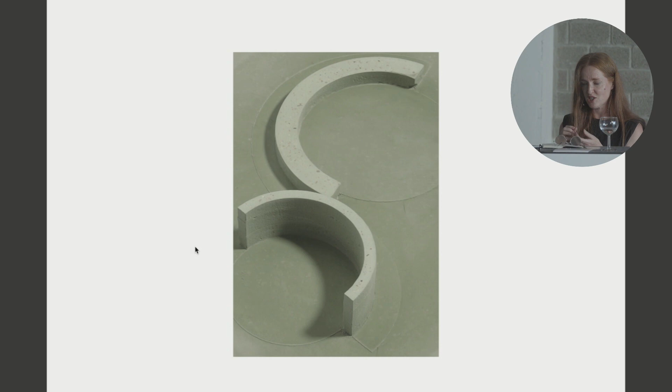So this is Emma making it with very particular colour pigments, and then we sanded it to reveal an aggregate on top, to try and describe the pieces that might go into it - the sort of fossils that would emerge over time and on initial completion.

And then there's the other story - not the story you tell at the beginning, 'I'm going to make a wonderful story, I have this great vision, all the children are going to be happy, problem solved.' Rather, they're going to be happy because we've really engaged with what material we're going to invest in, and we're going to tell you and invite you to be part of that process.

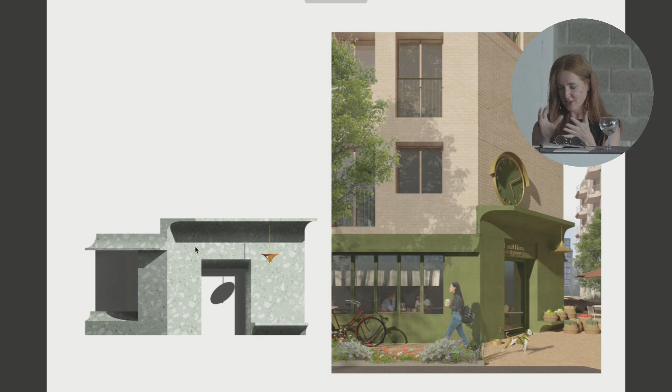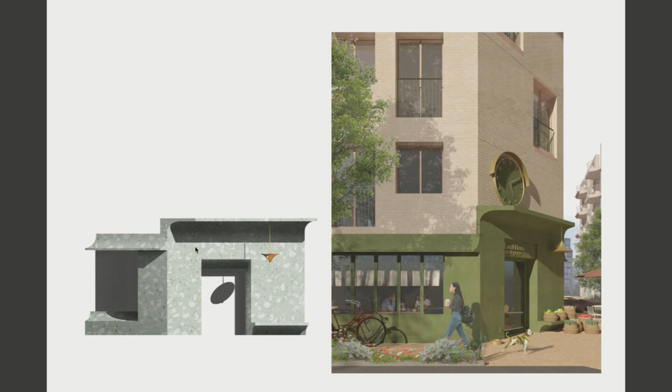That kind of mindset has moved forward in a number of master plans we're working on. This is one piece for a bid - a corner, a very important exclamation mark on a master plan that talks about a community, how it will fit and respond. We talked about the idea of a real investment in this corner, beyond a beautiful design, something structured from the locality with teams of the community involved in its genesis.

When I set up my studio, one other thing I did was set up a residency program - inviting in creatives, artists, to work alongside us in the studio, not to collaborate in the sense that we all know about.

So what I wanted to do was invite other creatives into the studio to just try and break away from the kind of day-to-day dialogue. So this was one resident.

Nigel Peake, who came into the studio. He hid in a cupboard. He drew and drew and drew all day. Amazing drawing styles, 8 layers of pencil each time. And these drawings are drawings of things that he heard, things that he saw, and some architectural conversations that he was part of. So it's thinking, textures, doing, reactions.

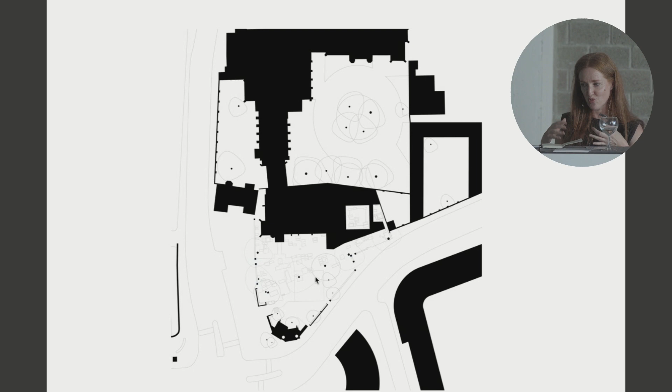And what our client had cleverly decided to do was, can you see this moving, to take an existing garden that sits in front of the site and conjoin it with the Garden Museum, garden being the operative word, and showcase horticulture, add education rooms, and allow cohorts that might not have access to horticulture as an education program, making that a very visible part of the city. That was their brief. And this is it.

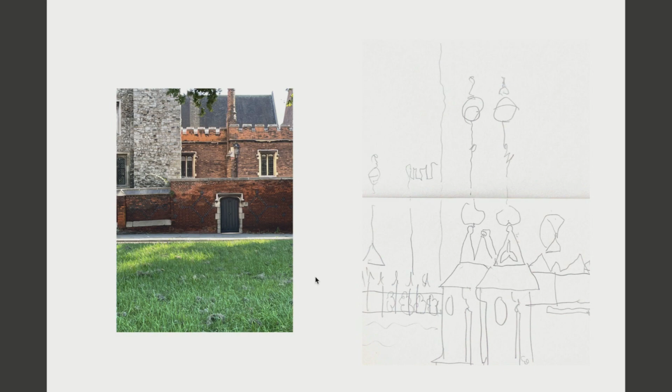I mean, you've all been to London, I'm sure. It's incredible, it's Lambeth Palace. Layers and layers of material, beautiful texture, lots of pieces built up over time, but also these very intricate pieces, door handles, portals, very much tuned to the scale of a person.

We were very intent from the off that it would be a landscape-led project, and by that I mean a genuine conversation with the landscape designer, who happens to be Dan Pearson, we're very lucky, and the architecture, and the two would really rub off each other in a very positive way.

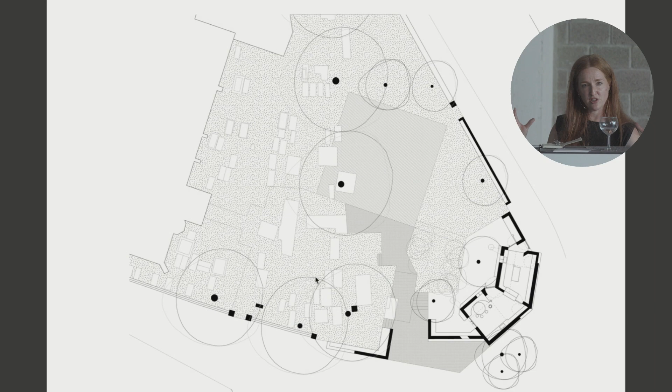So our idea, picking up on the vision for the building and how they wanted it to reach further than just the facility itself, was that we would make it of London.

So we're aware of the circular economy. We're aware that we need to take materials and reuse them. So the project is, in fact, now a project that tracks all of the buildings being stripped out or demolished in London within an X mile radius, X equals, we don't know yet.

But we're going to build the perimeter of the wall in fragments. So we're going to collect the material, reduce it to an aggregation, and we've worked out a method to build a whole sequence of structural walls, which are all essentially pieces of London. So it's almost like taking London, breaking it down into paint, and then painting this perimeter to the garden. And these are some studies that we've done.

Couldn't quite get it made in the same way, which is really frustrating. The idea is that we'll have very dense aggregate at the bottom, and the aggregation will get finer as you go to the top, as we start to introduce the finer details.

But essentially, going back to my first drawing and the Egon Schiele painting, we want the framework of the building to be visible, so that the motifs and shapes are almost emulating the drawing by virtue of building a frame into which you pour the material. And this is a whole sequence of those pieces, and then as they come together.

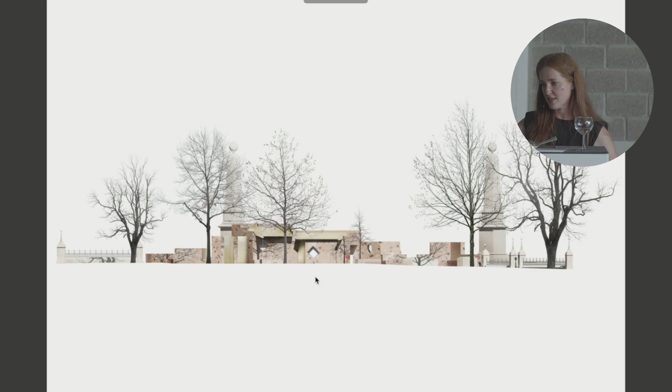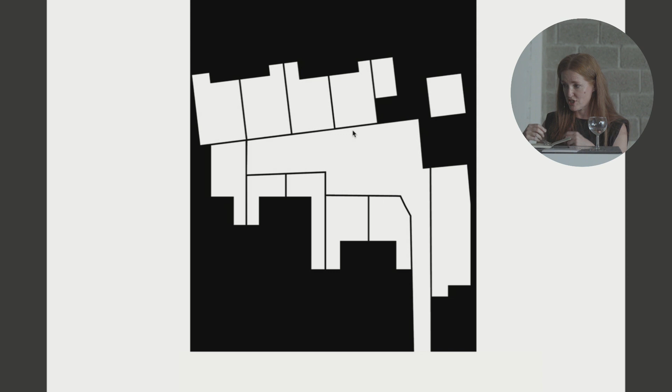This is another site for a house that I built for myself many years ago. It's a backland site. The plot is the L-shaped piece in the middle, and if I go to the next slide, the black shapes are all of the solid buildings encroaching in on it. The lines are the walls.

So what we wanted to do was, well, my reaction—we all dream of building our own houses from year two at university, and I had an idea of something. When I found the site, and sites are rare, I didn't build that at all. What I wanted to do was build a very modest building, a building that might disappear. It was a beautiful site, completely overgrown, just brick garden walls, lots of the solid brick still there.

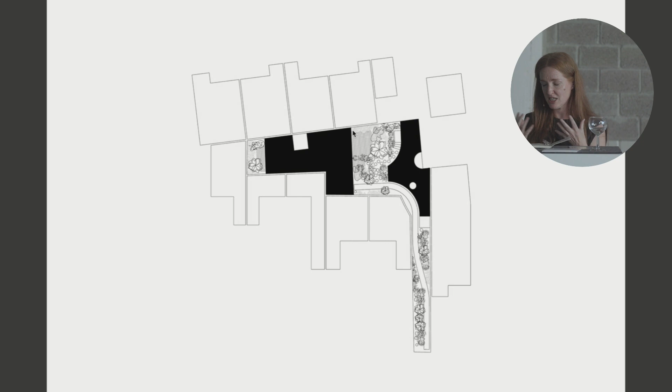The scheme essentially introduces a two-phase project. In the first phase, my house got sold to someone else in between, and the third person came back to me, and I built the third wall. The idea is that the building would host a garden, a very dense and wild garden. It's a kind of rewilding project, but designed as a house with portals. The inner space is almost like a cave, but in time, what I imagined was that the structure would become consumed again by the garden.

So the inside is really lovely. It does everything my client wants it to do. He's a contemporary composer. He gets his beautiful views out into a lovely garden designed by Non Morris.

But then bringing this back—I keep forgetting to bring my talk back to the Fritz Schumacher quote—in the end, what we got completely obsessed by was the door handles and how you'd enter this building, the push and the pull, and how they would manifest. We imagined that it might be the last visible, or maybe even the last remaining, piece of this architecture. We modelled it in polystyrene and clay, and decided that the pull would have a certain formal quality, and the push a slightly lazier feel about it. We spent quite a lot of time researching that very precise component.

How am I doing for time?

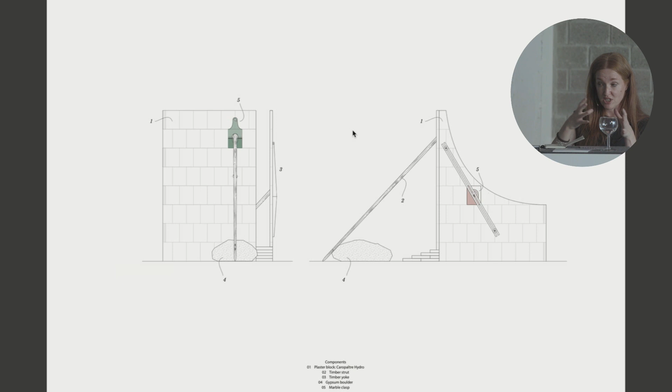But so what we made was a structure that was a vessel. It was a square, it sat in the courtyard. We pulled it up high to its limits, and we then engaged with a structural engineer who said, you don't want to do that, it will fail. And we said, well, we want to celebrate failure.

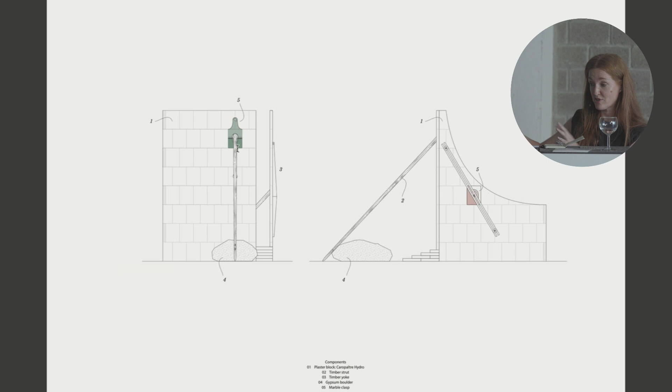So we celebrated failure by introducing these stone roses. We went out to the world and found some lovely pieces of marble that were just not going to be used. We found a stonemason to make those roses into these shapes.

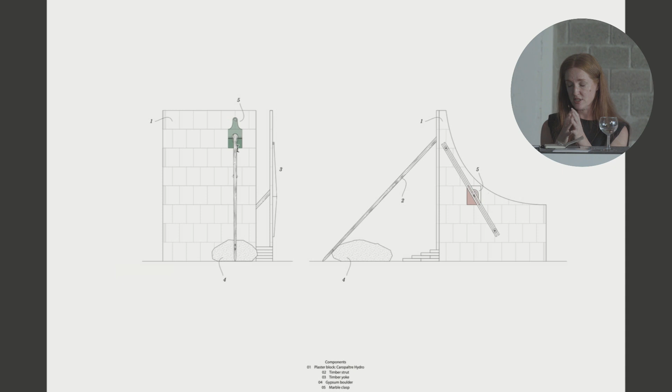And then we needed a prop, which was my paintbrush stick. So we went out and met up with some carpenters called Xylotech, and they made these beautiful props, which rested on boulders. The boulders were made of solid gypsum, excavated and contributed by the manufacturer of the actual blue gypsum block.

So it was a really nice sequence of operations, and I'll fly through these. We got this beautiful green marble, and found pink marble for a second clasp. They were worked, they were delivered, really loved—I mean, we were more excited about the pieces, I have to say, than the kind of finished piece.

And the same applied for the timber work. It's a shame I didn't put a picture in with a man on it, but these boulders were massive, and they came through Versailles in front of the palace on a truck, and they were hoisted into site.

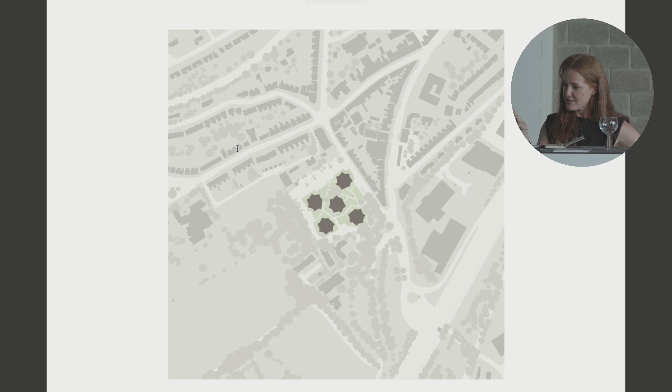This is the last project, which is Lion Green Road. So I'm jumping up a scale here. This is a project that's been in the office for a really long time, and this scheme is probably the most awful, depending on who's looking at it.

But it's a project that came about in this form because of where it is. It's very much driven by its setting, in the London Borough of Croydon. It's a bizarre urban collage of suburban properties—lovely suburban properties to the north—and a town which is all sorts of things, made from other things without any thought or master planning, but nonetheless pieces of the city that the planning system is very keen to preserve.

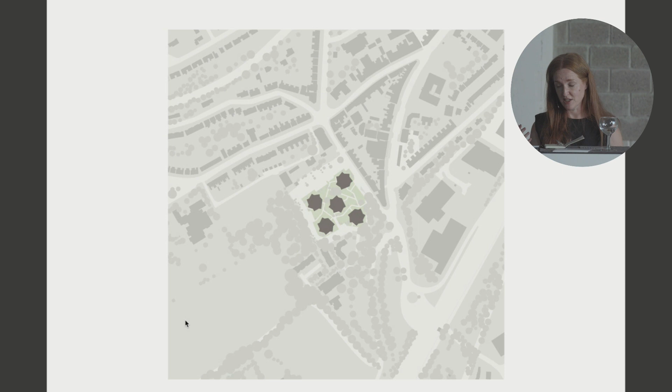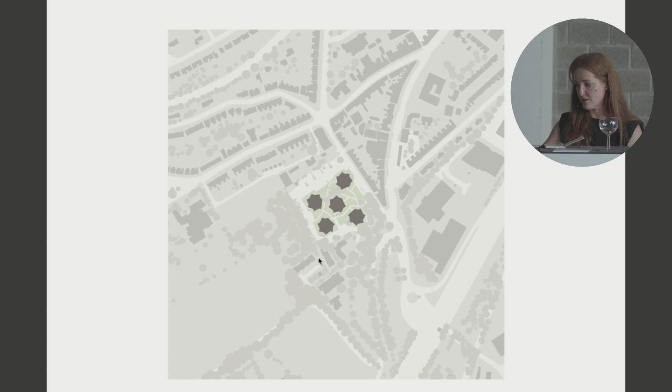So in London you need very strong reasons to move away from those particular urban grains and structures, and we had good reason here, which I think was fortunate. The most important one was that the south of the site is an enormous piece of open land that we were able to capitalise on, with a boundary at the rear that's a scheduled ancient monument—actually one of the oldest pieces of the Surrey Iron Railway, the only piece left in the UK. You can't see it, it's just covered in trees.

But nonetheless, the heritage team, Historic England, wanted to retain it. So the scheme is that the site is green, very green, with a lovely suburban quality to it, but more green than architecture. We were really interested in that, and wanted to make a kind of architecture that came from it.

I really like the idea that maybe there's a way we can find an architecture where the two start to coexist, and talk less about fenestration and windows and more about a merger—a series of dwellings that really understand they're embedded in the landscape, and that the landscape has genuinely influenced the way the forms are made.

So we imagined a soft textured, pigmented base with a dense pigmented structure, and then a series of buildings would grow out of that, connected by a series of very softly carved pathways.

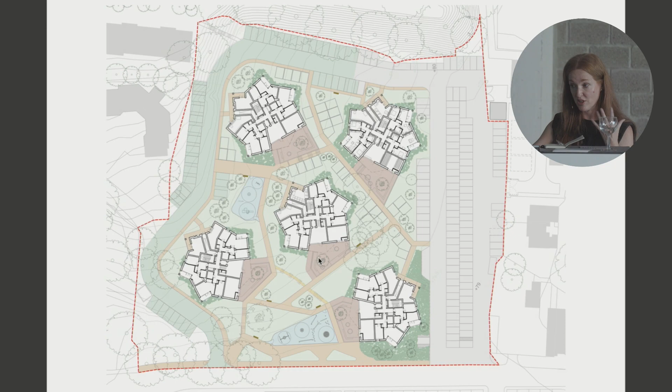The scheme is driven by the idea that all of the units will be double aspect, so there are no fronts and backs—a very common condition in London. Regardless of whether your site sits independently on land, you always have this problem of where the fronts and backs are, and whether the backs will encourage antisocial behaviour.

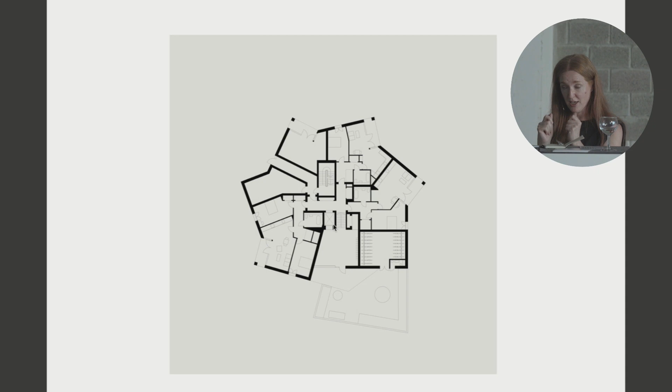There are 3 typical floor plans—ground, first, and a block that's sliced, opening up views, allowing trees to go, and allowing views to the back of the site. They're really simple: a large entrance lobby with access throughout the building, very compact. In London design codes, every unit is no more than half a metre one way or the other—you're simply not allowed, or not able, to build beyond that.

Then there are routes to the back, designed so that you enter, you meet and greet, you place your bike somewhere, and you can use a garden shed positioned at the front. But you have to go to the back to put your bins out, and you have to go to the back to take certain routes within the park.

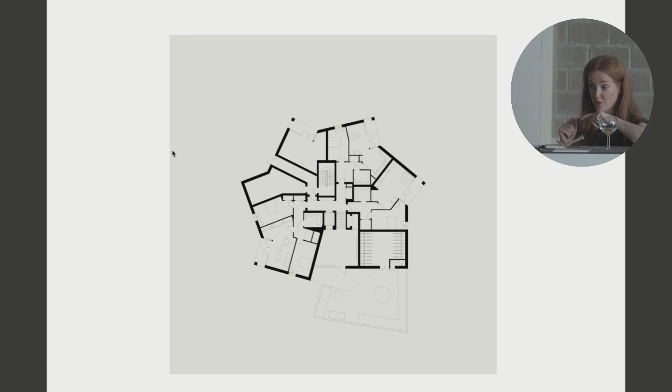It's deliberately designed, placing certain human activities to ensure that the building is constantly permeable. It's 50% affordable housing, predominantly 1 and 2 bed units, but a reasonable percent, about 10% across the project, of 3 beds.

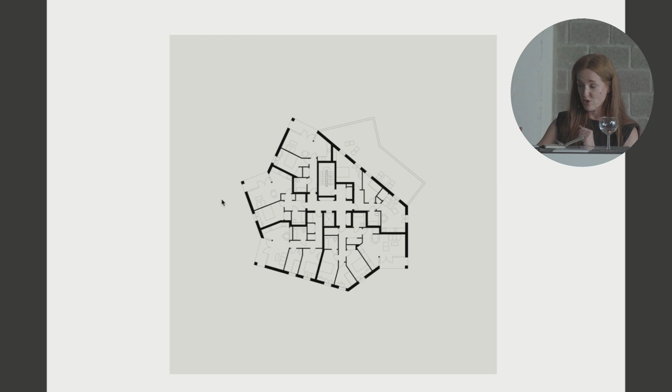Whilst it's a pinwheel structure, the rooms are always at 90 degrees to the main wall, so there isn't that complexity or willfulness where you design something in a tight area but waste corners through weird angles where you're unable to place furniture.

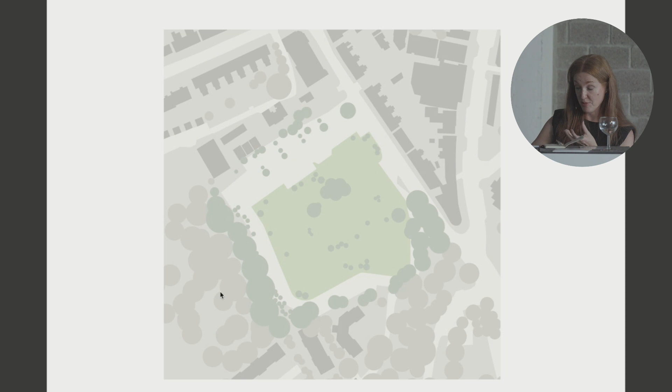I'll describe it quickly on plan. This is the site with the trees, we put more in. That's the area we're able to build on, which we're calling the park, because it links to the incredibly large, beautiful park at the back.

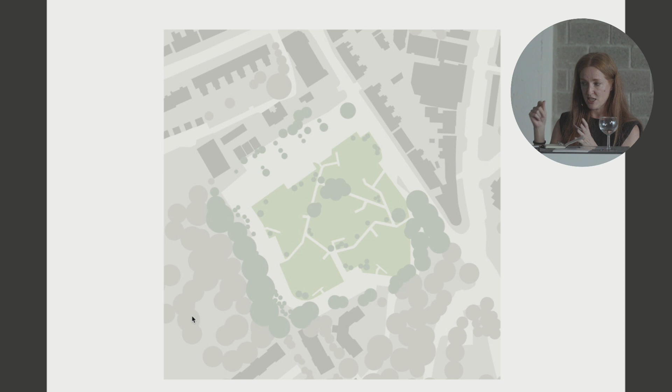Then we put in slow ramps that are 1 in 20 plus, so it's fully accessible. Then the plots go in, then the lobbies, the front lobby and the rear lobby, but you're able to move all the way through, and then the servicing to make sure those two entrances are always active.

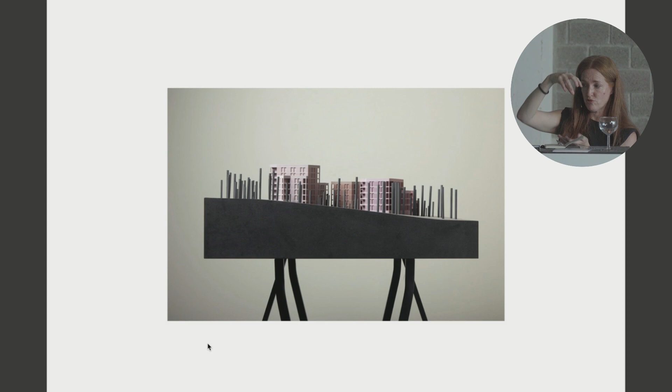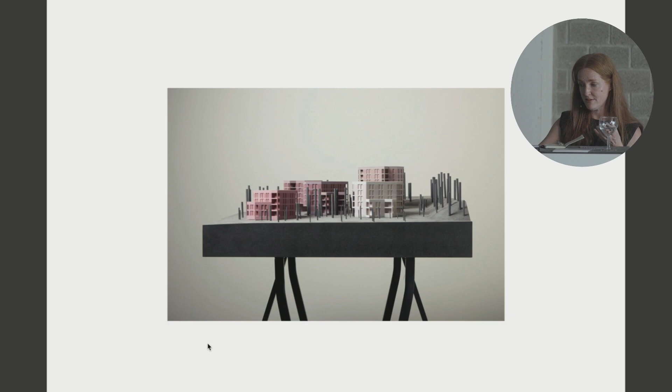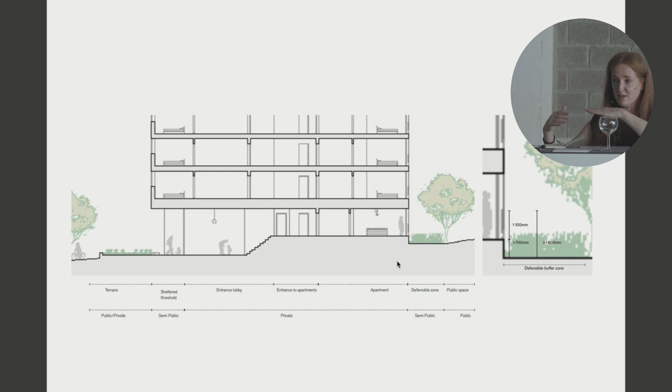But the aim then was to really prove that the park could work. The way it works - and I haven't got a great drawing of this - is you enter the park and can seamlessly move through it as a member of the public. Because the section shifts, you can enter it from a terrace, but you're always elevated. If you're in a ground floor unit, you're always elevated from the ground beyond you, so you're never in a condition where the public park is right up against your window.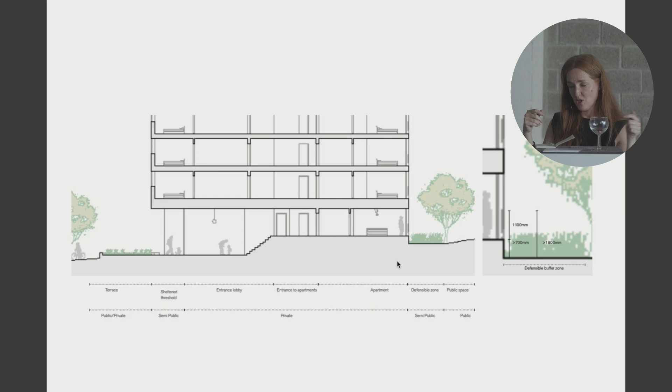Add robust planting - there's always a zone around the building that's a sort of no-go zone, what we're calling public-private. It's essentially a scheme that doesn't have solid walls and planting; it's a scheme with buildings that sit and embed in a soft landscape, with entrances running directly in and through the building.

These are some of the sections that describe how those adjacencies work. The facade is very simple - this diagram shows there's a repeat form on every single block, all five. It's not a prefab, but the rules are the same, and rules are important when we're building buildings.

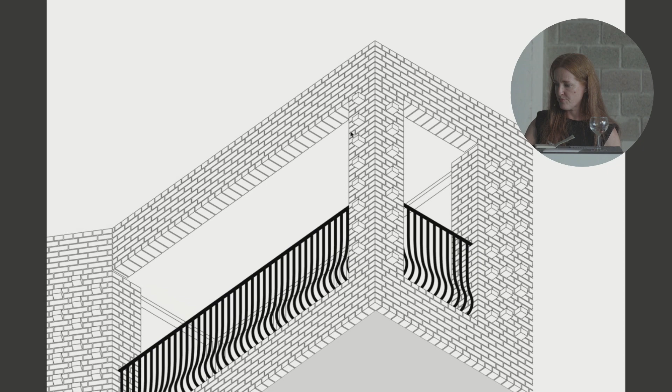The texture was achieved with a brick we spent quite a bit of time trying to source, but it's just a solid through brick without any texture. The texture is achieved with turned English bond bricks, so they're kind of prickly buildings with these lovely balconies that bellow out at the base.

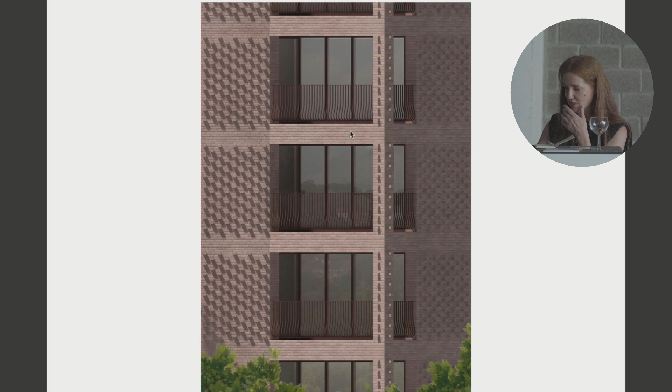We have this idea that at this point in time, we start with a building that looks like that, and it does look like that at the moment. Potentially, this life we're trying to promote - through the experience of living in a park, moving through a park - means you're constantly re-engaging with it as you enter your unit, with these beautiful visions of Croydon, which is actually a very beautifully landscaped place. And this is the end.

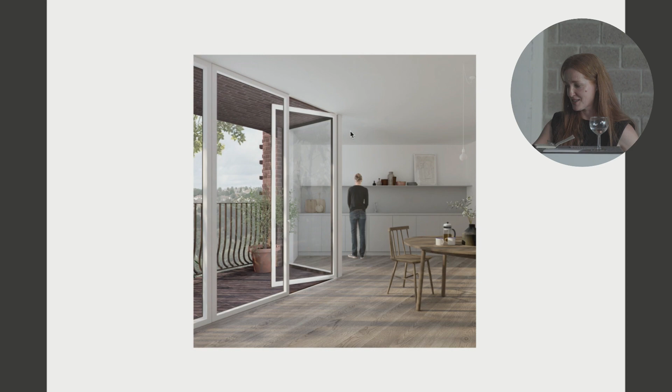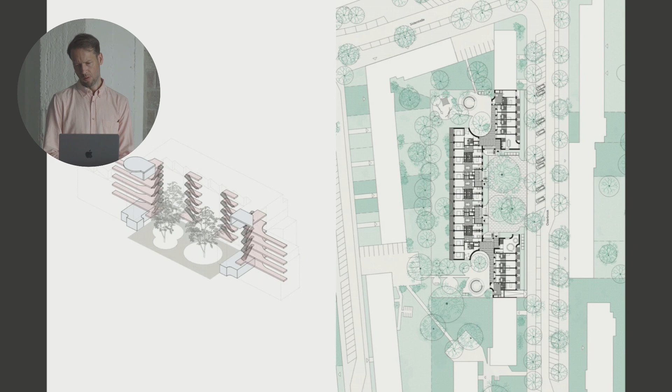Diese Gelenke hier sind im Grunde wie Scharniere. Die sind so ein Hybrid aus offenen und geschlossenen Treppenhäusern, also thermisch offen. Aber sie sind definiert, trotzdem kann man durchschauen und sie haben so eine gewisse Transparenz, dass sich diese Gartenräume vor dem Gebäude, aber auch in diesen Taschen hier dazwischen verbinden und dass das Gebäude luftig wird, auch wenn wir es als Burg denken wollen. Und hier sieht man das nochmal im Grundriss, wie wir eine Verknüpfung herstellen zwischen einer Laubengang-Typologie.

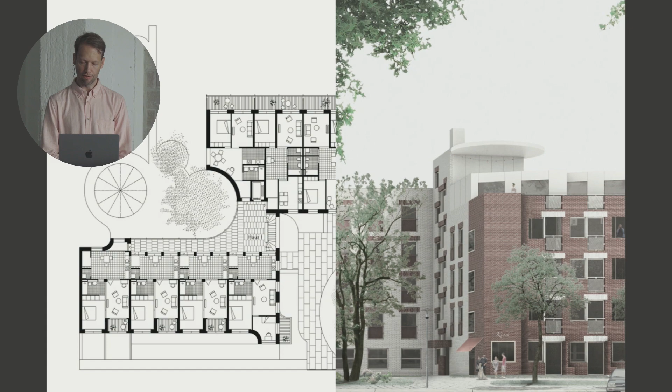Und dieser Laubengang ist sehr kurz mit nur 4 Wohnungen, an denen wir diametral gespiegelt nochmal 2 Wohnungen dranhängen, also 6 Wohnungen an einem Treppenhaus. Und insgesamt dadurch, durch diese Effizienz, auch eine viel bessere Ausnutzung des Grundstücks und ein Agieren vorne und hinten mit den Grünräumen drumherum. Und ein Interesse daran, diese Ecken auch plastisch zu machen, die Gestalt und das Plastische zu nutzen, um das Öffentliche zu stärken, mit einem Kiosk, mit einem Kamin oben zum Grillen, mit einer Dachterrasse natürlich und mit einem Treppenhaus, das zum Hof offen ist und wo sich verschiedene Fenster übereinander stapeln.

Hier sieht man das nochmal insgesamt im Grundriss und wichtig ist uns, dass wir die Bautiefe der Nachbargebäude aufgenommen haben, aber dass wir die Tiefe dann manipulieren, dass wir die Fassaden nach außen ziehen und nach außen drehen, um die Bäume drumherum, um das Gebäude geschmeidig zu machen, aber um die Flügel auch ein bisschen tiefer zu machen.

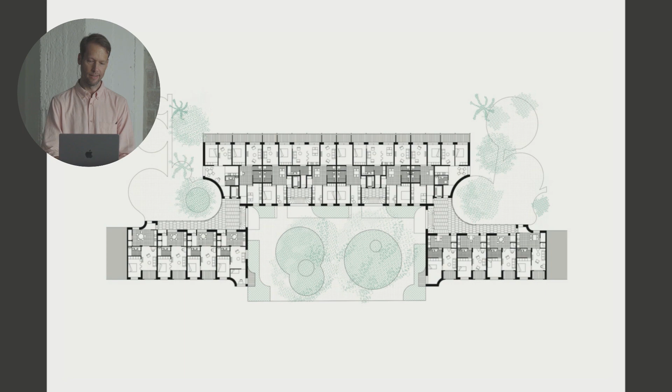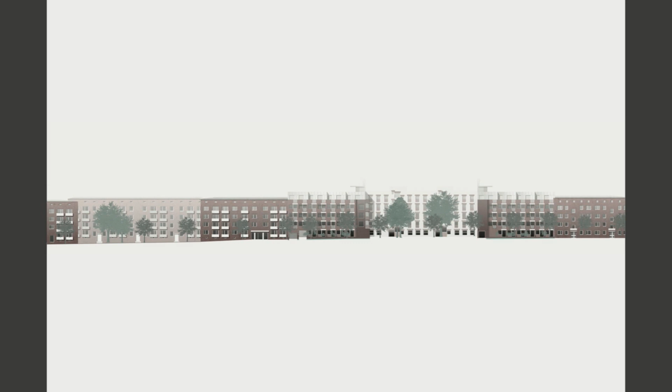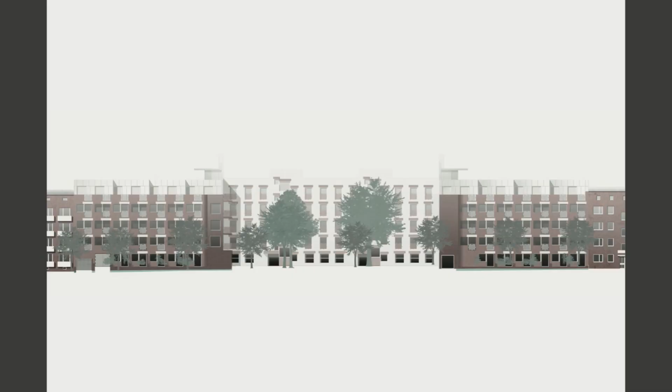Wir sind ja begeistert von dieser Rot-Weiß-Palette in Hamburg, von Ziegeln und weißen Sturzelementen oder weißen Ziegeln. Und man sieht es in Gebäuden links im Bestand. Und wir sind ja hier im Genossenschaftswohnungsbau und das Budget ist deshalb nicht ganz so üppig und deshalb macht es uns auch Spaß, an diese Themen anzuknüpfen, mit der Konvention zu arbeiten, aber ohne dass es konventionell ist, so hoffen wir, und dass wir diese Themen der Fassade von dem Weißen und von dem Roten weiterführen, dass wir die Nachbargebäude im Schulterschluss übernehmen und daraus ja fast wie ein Textil entwickeln mit einem Geflecht aus Stürzen, aus Fenstern, aus Loggien, aus zarten Balkongittern, um die Fassade plastisch zu machen, einerseits um sie zu beleben, aber auch um ihr eine gewisse Ruhe zu geben.

Und diese textilen, fast geflochtenen Fassaden sind dann an den Ecken nochmal asymmetrisch betont durch besondere Wohnungen, die wir dort nach außen drehen.

Hier sieht man es nochmal von der Seite, wie der Hof jetzt Teil von der Straße wird, aber auch ein heller Raum durch diese weiße Auskleidung. Und zum Garten stellen wir uns eine große Veranda vor, also eine üppige Freifläche, um allen Bewohnern einen möglichst großen Anteil an diesem Gartenraum zu geben.

Und ich denke, das ist was, wo es sich wieder lohnt, diese Erhabenheit und das Großstädtische herzustellen, wo die Gebäude vielleicht auch ein bisschen größer werden, weil die Hochbahn den Horizont und das Erdgeschoss, die unteren Geschosse im Grunde liftet und damit auch einen größeren Maßstab der Gebäude evoziert. Und dieser nutzbare Straßenraum, den gab es früher, wo man sich aufgehalten hat, wo man flaniert ist.

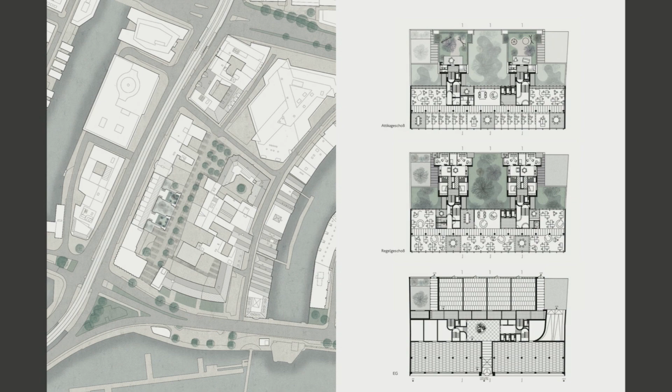Und im Grundriss gestaltet sich das dann von unten nach oben unterschiedlich. Das Erdgeschoss nutzen wir komplett aus, fast. Es ist ein sehr tiefer Grundriss geschichtet mit einer eindeutigen Adresse zur Straße. Unten mit sehr einfachen und flexiblen Räumen, eine Erschließungszone innen und nochmal eine gewerbliche Zone im Erdgeschoss zum Hof, die aber auch durch diese Schichten im Innern verbunden werden könnten.

Und oben drüber haben wir einen Büroriegel, der wie eine innere Straße parallel zum Rödingsmarkt formuliert, und zwei Wohntürme nach hinten zum Hof mit ganz viel Grün dazwischen. Und diese beiden Typologien verbinden sich ganz sachte mit zwei Treppenhäusern, die durch diese Doppelung etwas Opulentes bekommen, fast Barockes, obwohl sie sehr effizient hier eingebaut sind.

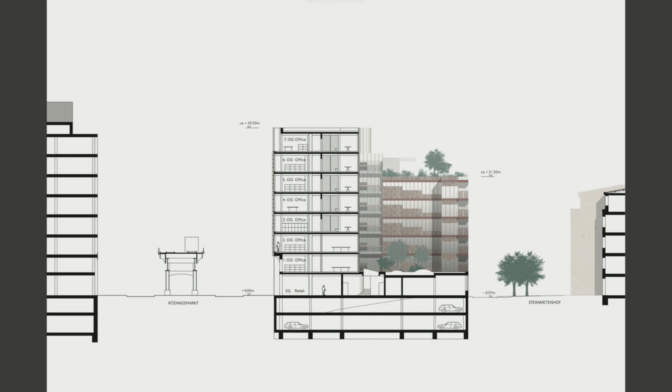Uns gefällt es, wenn man das Gebäude zoniert und wenn man es gliedert. Und am Rödingsmarkt ist das besonders wichtig, weil es ja diesen Raum unter und über der Hochbahn gibt.

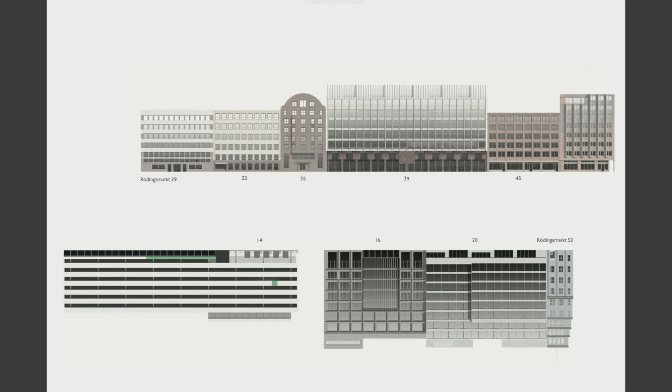Und im Straßenraum sieht es dann so aus, und es macht uns Spaß, immer die gesamte Straße zu zeichnen, dass sich unser Gebäude oben in der Mitte einreiht in die Farbigkeit. Es ist ein großes Haus, aber ich denke ein Maßstab, den der Rödingsmarkt vertragen kann.

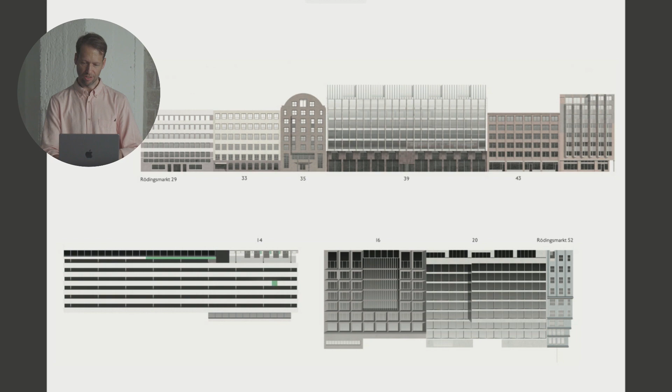Und das ist ein Gebäude, das unten am Boden ankommt und viele Eingänge bildet, die flexibel genutzt werden können für verschiedene Einheiten. Ein großer Eingang in der Mitte markiert eine Adresse, aber es gibt so eine Art Souk oder Markt unten im Erdgeschoss, um diesen Rödingsmarkt auch ein bisschen ins Gebäude zu holen.

Und Sie alle kennen ja sicher den Isemarkt. Wenn man den kennt, dann fällt es nicht schwer, sich den hier unter der Bahn vorzustellen. Das ist eine Aktivität und eine Aneignung von diesem Straßenraum beiderseits, unter der Bahn, aber auch unter dem Gebäude.

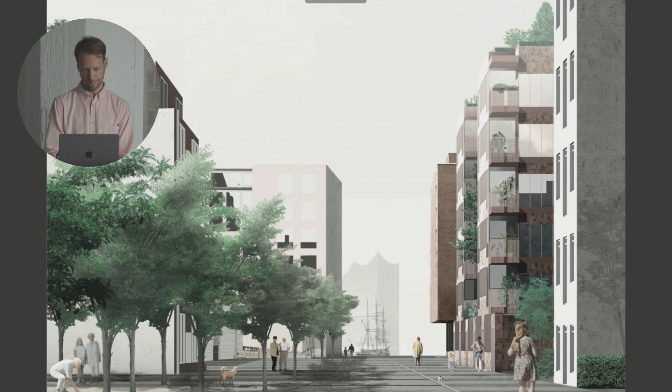Und zum Hof machen wir das ganz anders. Es gibt hier diese Baumreihe, und wir gliedern uns ein in diese Türme mit ganz schlanken Wohntürmen, wo das Wohnzimmer, die Wintergärten und die Balkone jeweils einen eigenen Turm haben, um den Baukörper filigran aufzulockern.

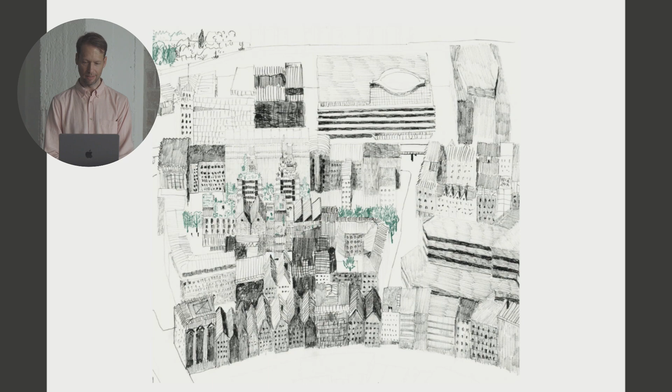Manchmal muss man auch das Medium wechseln als Architekt. Wir haben das gesehen bei Mary Duggan sehr schön, wie sie mit verschiedenen Formaten und Medien sehr handwerklich arbeitet. Und wenn wir den Bleistift ansetzen, dann ist es oft einfacher, Zusammenhänge herzustellen.

Und diese Spannung in der Stadt gefällt uns gerade da, wo es kompliziert oder komplex wird, wo viele Sachen aufeinanderstoßen, so wie hier von der Deichstraße am unteren Blattrand bis zu den größeren Strukturen aus den 70ern oder 60ern. Und wir hoffen, dass ein Gebäude dazwischen auch vermitteln kann, zwischen den verschiedenen Maßstäben, und beides sein kann - zwei verschiedene Qualitäten, eine nach außen, eine nach innen, und vielleicht, dass diese Widersprüche teilweise auch helfen, um Spielraum in die Gebäude einzulagern.

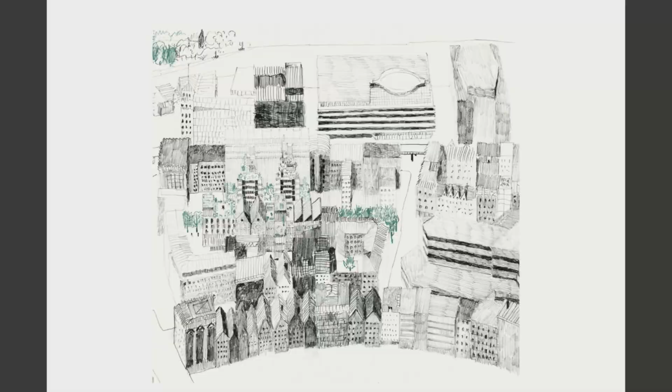So, ich gehe jetzt zügig weiter zu dem Projekt in London.

Das fängt schon damit an, dass die Schlafzimmer und die Betten kleiner sind. Also ein Bett ist nochmal mindestens 20 bis 40 Zentimeter kleiner als hier, und das schraubt sich dann hoch durch die Schlafzimmer in den städtebaulichen Maßstab, denke ich. Und unter diesem Druck stehen wir hier so ein bisschen auch.

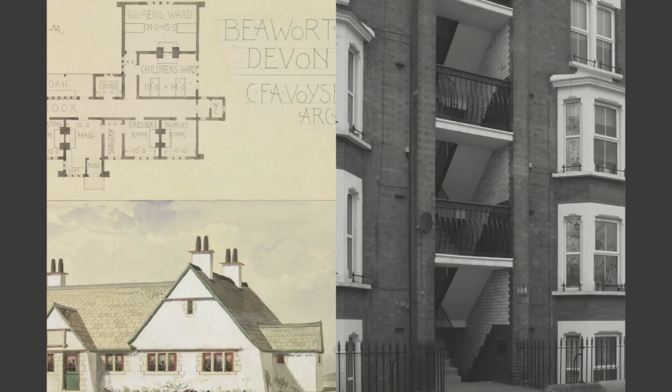Und wir dachten, es könnte daher schön sein, wenn wir uns nochmal anschauen, was vorher war mit dem englischen Haus von Muthesius. Eine Qualität, die wir an dem englischen Haus schätzen, ist, dass es geschmeidig ist, dass es in der Lage ist, auf verschiedene Richtungen, auf Komplexität zu reagieren, dass es in die Landschaft ausgreift und dass es malerische Qualitäten hat. Und dieses Malerische ist eine schöne Strategie für uns, weil wir uns vorstellen, dass wir in einen nassen Malgrund im Grunde hineinmalen und den Ort damit auch manipulieren können.

Und rechts sehen wir ein anderes sehr wichtiges Bild für mich persönlich. Das ist da, wo ich ein paar Jahre lang gewohnt habe. Und das Schöne an diesem Gebäude ist, dass es ein öffentliches Treppenhaus gibt. Und zurzeit zeitgemäß und interessant, dass Laubengänge wieder en vogue sein dürfen.

Und hier ist ein viel früheres Beispiel mit diesem außenliegenden Treppenhaus, das den Baukörper gliedert, aber im Grunde so eine Art Human Theater herstellt, wenn man die Treppe hochgeht und man von den Landings, von den Treppenpodesten auch immer den Blick zurück in die Stadt hat bei dieser zweiläufigen Treppe.

Die Dächer aus dem Arts-and-Crafts-Kontext sind für uns sehr wichtig, um das Gebäude in diesen Kontext reinzu massieren. Und wir schließen deshalb an das Bestandsgebäude hier an.

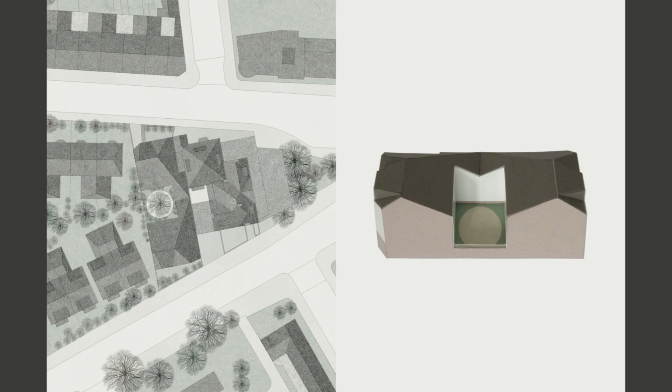Das ist ja dieses hier im Vordergrund. Und wir versuchen in diese Komposition von Dächern unsere Dächer hineinzukneten und ein Gebäude zu machen, wo es nicht ganz sicher ist: Ist es ein großes Dach oder sind es zwei Flügel mit verschiedenen Dächern? Aber letztendlich wird es Teil von diesem Gebäude im Vordergrund.

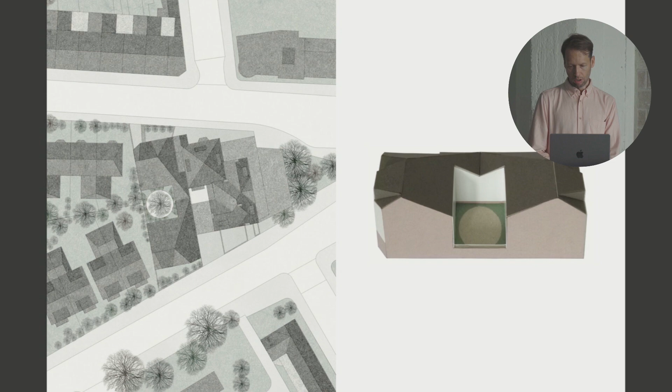Da nehmen wir uns zurück, lassen den im Vortritt, und unser Gebäude ist im Grunde das Rückgebäude. Und der wichtige Schwerpunkt von dem Gebäude ist der Hof im Innern, weil er alles zusammenhält und weil das auch zum Eingangsraum für die Wohnungen wird.

Auch hier die Straße, hier sieht man, wie unser Dach schräg abfällt und sich lehnt an das andere Gebäude. Das hat auch planungsrechtliche Gründe mit den Rights of Light, die Lichtrechte, die man verhandeln muss mit den Nachbarn. Und wir wollten hier keine Verhandlungsmasse liefern, deshalb haben wir unser Gebäude abgeschnitten mit einem großen Dach, und dieses Dach ist auch zum gestaltenden Element geworden und zu einem kollektiven Element, weil so jede Wohnung einen Dachaspekt hat, so wie auch jede Wohnung eine eigene Wohnungstür zur Straße oder zum Außenraum bekommt.

Wir sehen das hier im Grundriss, und ich gehe nicht im Einzelnen darauf ein, aber man sieht den Hof im Inneren, wie er zirkuliert, und diese Gebäudeflügel mit verschiedenen Wohnungen, die alle unterschiedlich sind. Das war eine Vorgabe, wie er das Gebäude auch zur Ruhe bringt und einen Schwerpunkt herstellt.

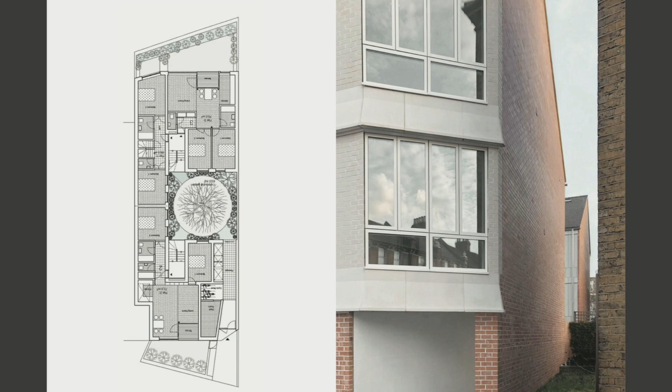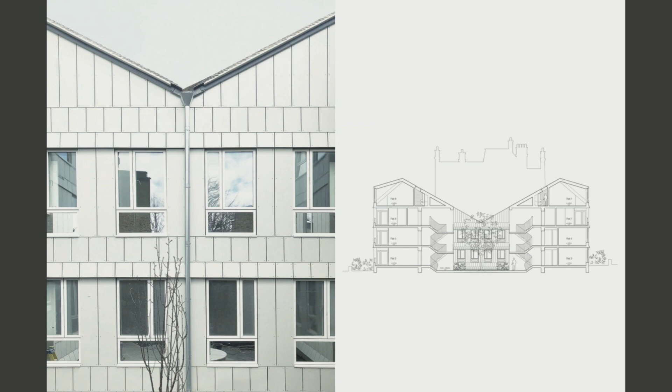Hier rechts im Schnitt sehen wir, wie das Gebäude an dem Hof ganz tief nach unten kommt, wie wir den tiefsten Punkt in den Hof reinziehen, um viel Licht in den Hof reinzubekommen und diesen Moment möglichst schön zu machen, wo die Treppenhäuser abgehen in die Wohnungen.

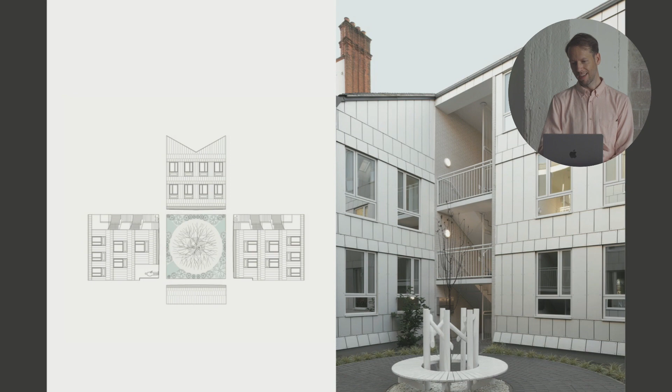Und hier ist es nochmal mit einer Dezemberfotografie und ein bisschen mickrigen Bäumchen in der Mitte. Aber das ist dieser Hof, der nicht sehr groß ist. Der ist ungefähr 10 mal 10 Meter. Und ich würde es im Grunde gar nicht wie einen Hof bezeichnen, sondern vielleicht eher wie ein Zimmer, wie ein Gartenzimmer, wie ein grünes Foyer, das einen würdigeren Eingang zu den Wohnungen herstellt.

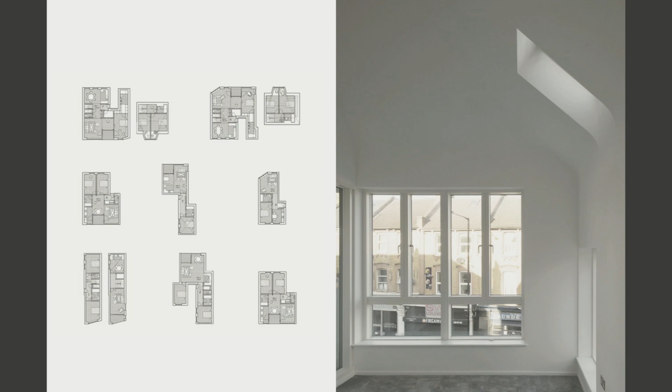Hier eine große Öffnung mit einem Blick in die Nachbargärten. Das ist sehr wichtig, um diesen Hof erfolgreich zu machen. Und hier nochmal, wie sich das Gebäude in die Straße einfügt und auch nicht so stark wahrnehmbar ist. Dieser Mix an Wohnungen, wo jede ein Dach über dem Kopf hat und dieses Dach sieht überall ein bisschen anders aus, aber es gibt einem das Gefühl, in einem Haus zu wohnen und auch eine gewisse Adressfähigkeit oder Gemeinschaftlichkeit der Bewohner untereinander. Und so entsteht mit den Nachbarn ein gewisses same, same, but different, eine abwechslungsreiche Fassade, die aber über diese Gesimse geordnet wird.

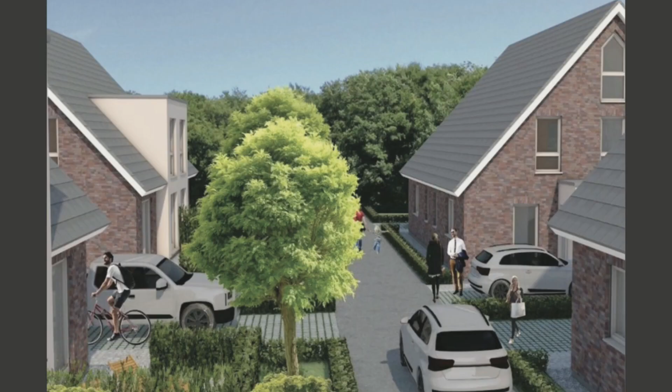Und wenn wir nochmal über das Private und Öffentliche sprechen, ist es interessant, weil dieser Hof im Privatbesitz ist, aber öffentliche Elemente übernehmen kann. Kulturelle Elemente als Markthalle und als Kompensation für das Dorf, das hier verloren gegangen ist. So sieht es dort nämlich im Moment aus. Das wird gerade gebaut. Das ist kein Art Piece, sondern die Realität nebendran.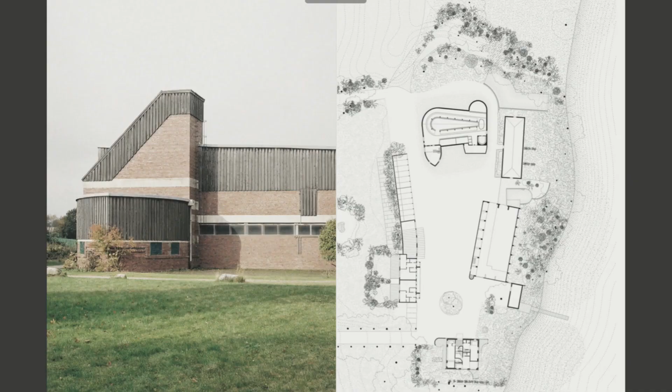Ich kommentiere das nicht weiter, aber man muss es sacken lassen. Moment. Und wir sind hier, wir haben diesen Hof aufgenommen mit Bauaufmaßen, weil wir ihn restaurieren, weil wir diese hochdenkmalgeschützten Gebäude reparieren. Und das Interessante ist jetzt, dass Hugo Häring hier im Grunde einen Hof geplant hat wie ein Dorf oder wie eine Stadt, mit einem Platz, mit einem Anger in der Mitte. Und Häring tickte ein bisschen anders als Schumacher, vermute ich, und seine Gebäude waren alle sehr unterschiedlich. Und interessant finde ich an der Planung, dass die Unterschiedlichkeit der Gebäude um diesen Anger eben erst gerade durch diese offene Mitte möglich gemacht wird.

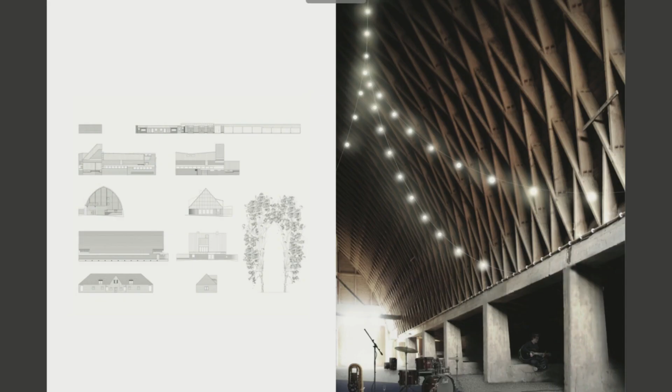Und wir sind jetzt an 4 dieser Gebäude dran und ganz unten planen wir ein neues Wohngebäude als Kopf von diesem Hof, auch als Umbau. Und die anderen Gebäude programmieren wir neu. Wir reparieren die, halten uns da auch gerne zurück. Unsere Arbeiten werden da unsichtbar sein, aber was sichtbarer sein wird, ist, dass wir diese Gebäude neu nutzen, kulturell, und dass wir Öffentlichkeit an diesem Hof möglich machen. Und dass es somit wie ein Dorf funktioniert, weil auf diesem Hof permanent Leute wohnen, aber eingelagert auch diese öffentlichen Momente sind. Und das gibt es in dem berühmten Kuhstall genauso.

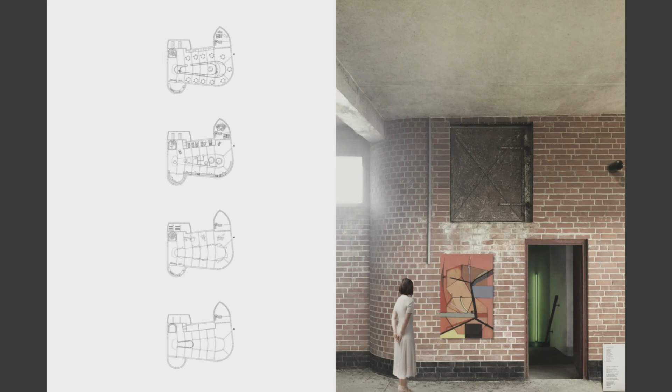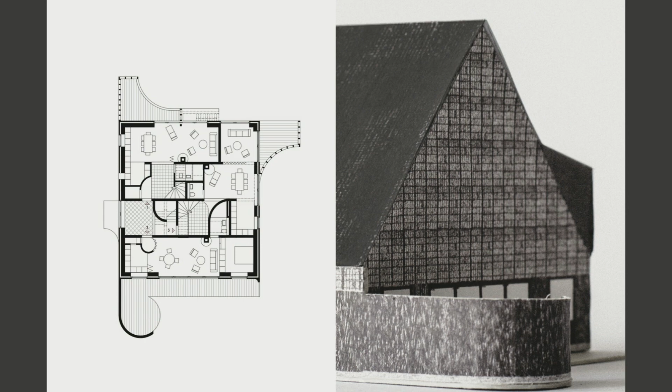Und in gewisser Weise auch ist dieses Gebäude, dieses Haus eine Gegenposition zu der Einfamilienhaussiedlung, die wir vorhin gesehen haben, weil hier unter einem Dach 3 Wohnungen zusammengefasst werden, die sich nach außen nicht wirklich abdrücken, aber im Innern durch diese Rundungen geschmeidig ineinander gefaltet werden. Und ich denke, das wäre ein ganz interessantes Modell, jetzt vielleicht über gewisse Formen der Verdichtung nachzudenken, wie die auch im ländlichen Raum stattfinden könnte. Damit bin ich am Ende.